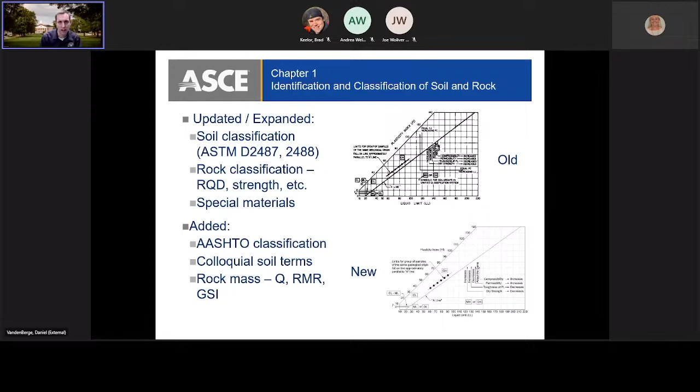Moving on to Chapter 2. This chapter is on field exploration, testing, and instrumentation. We updated and expanded the sections on field reconnaissance, remote sensing, and geophysics. Many things have changed in the last few decades in those areas due to technology and the availability of materials on the internet, and we felt the need to explain some of those in more detail.

One side note here, since I just mentioned the internet: we did our best to actually keep URLs out of the document because we didn't want links becoming dead with time. So we will tend to refer to locations or types of websites, but we tried to refrain from specific URLs throughout the document, and that was an intentional decision we made.

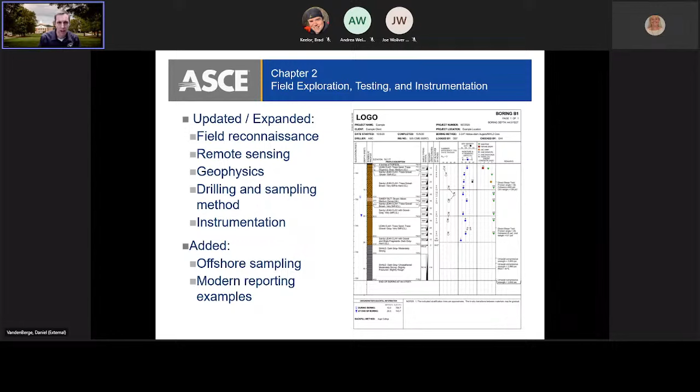Moving on to Chapter 3. This is a chapter on laboratory testing. We updated and expanded various parts of this. There's a large table, a few pages long in the new document, covering how much sample size you need for any given or common geotechnical laboratory test.

There's also an updated and expanded discussion of the standards and certification process, so people can understand how that works a little bit more.

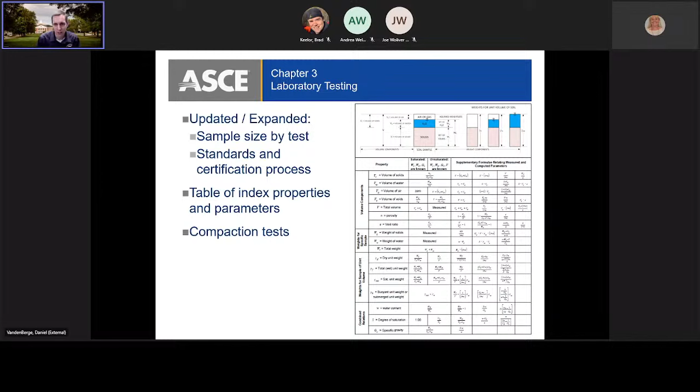There's a table of index properties and parameters provided in this case, and there's quite a bit of detail on compaction tests. There's a nice one-page figure that some academics may be thinking they need to get for their students—a nice supplement to all the different weight volume relationships we face in geotechnical engineering.

Chapter 3 also talks at length about strength tests. It discusses direct and ring shear tests, consolidated drained and undrained triaxial tests along with UU triaxial tests, unconfined compression, direct simple shear, lab mini vane shear test, as well as various dynamic testing methods.

Most of the test methods contain at least one figure showing both the apparatus and some of the data or results you would expect from that test. In addition, there's discussion of both incremental and CRS consolidation testing, hydraulic conductivity testing, as well as some basic rock strength testing.

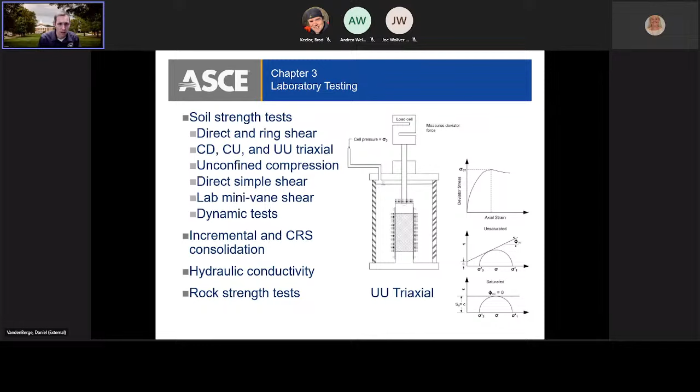Chapter 4 looks at the distribution of stresses. We've updated and expanded the sections on stress calculations and change in stress equations. This is a place where probably many of us grew up using some of the NAVFAC charts and tables. We've got a nice table focusing on many of the equations required for different types of change in vertical stress for different loads. We've also updated all of the change in stress charts, which we'll see a couple examples of on the next slide.

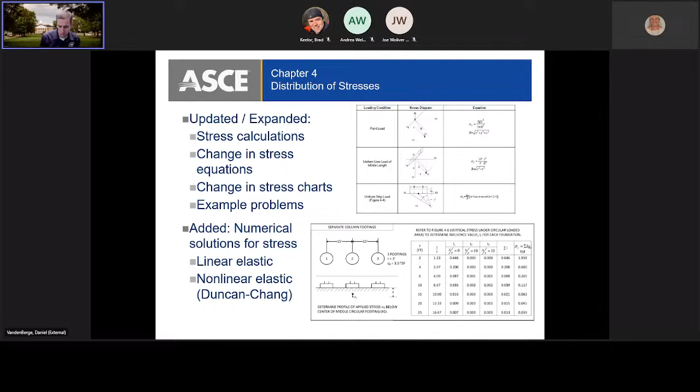And we've got some good example problems, so you could really spend some time looking at how we reach the solutions in these various example problems. One thing added to Chapter 4 is a few pages of discussion on numerical solutions for stress, recognizing that with the personal computing power we have, much of this does happen at the computing level. So we talk about linear elastic as well as nonlinear elastic numerical solutions for calculating stresses and changes in stress in the ground.

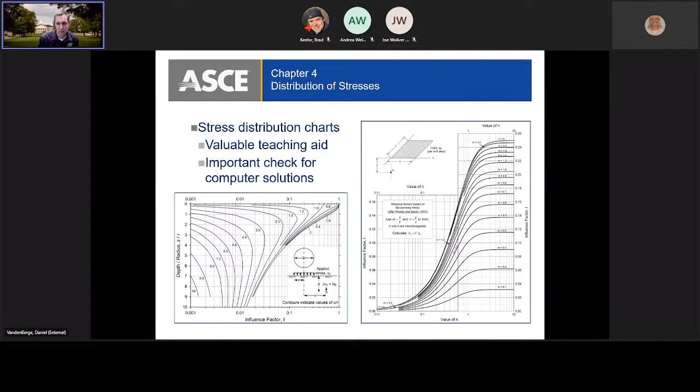A couple of the iconic charts from NAVFAC are shown on this slide. We recognize the value these have both for teaching aids as well as for important checks to computer solutions, or just for cases where you're not near your computer. We wanted to maintain and enhance the usefulness of these charts as well as some others included in the document.

Moving on to Chapter 5. This chapter deals with the analysis of settlement and volume expansion. This chapter was less so added to, but more reorganized and expanded. It starts off with a mechanics of consolidation discussion, going into a little bit of depth about what is going on in the soil during consolidation.

From there, we move into settlement of coarse grain soils, looking at a variety of empirical methods, and then settlement of fine grain soils using conventional consolidation theory.

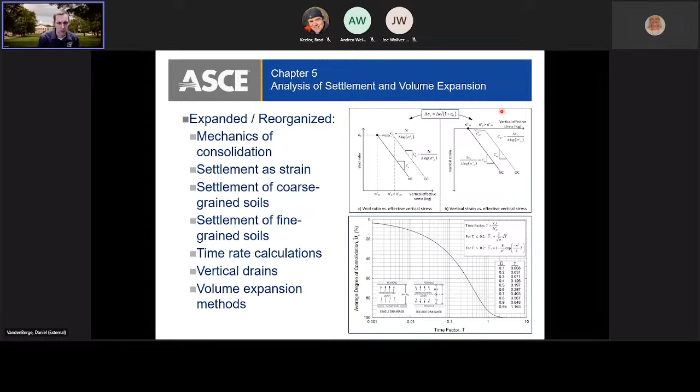If you plot the Cc correlations versus initial void ratio, you see a pretty consistent trend predicted by a wide variety of correlations. We've tried to do that in a number of places through the document, consolidating the known relationships into a more coherent whole.

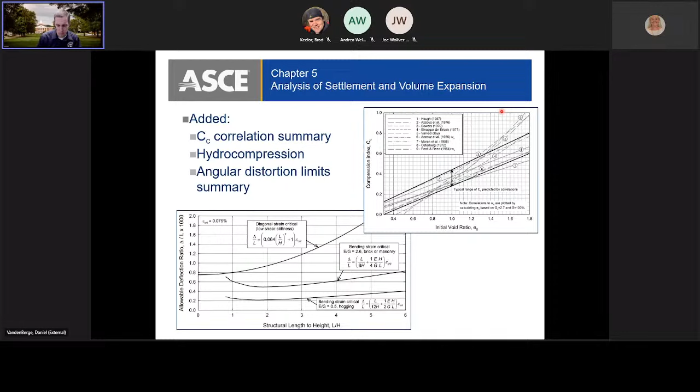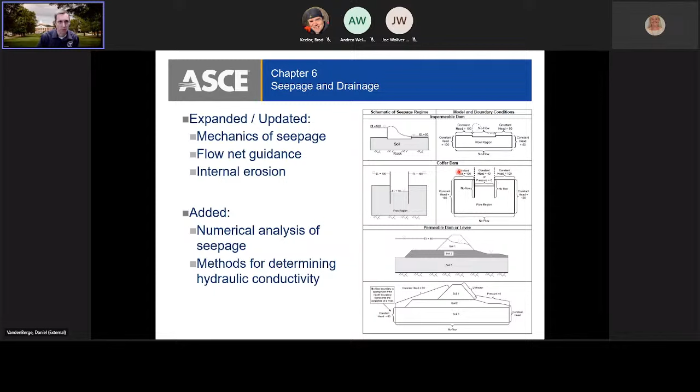We also had various methods of determining hydraulic conductivity discussed in this chapter. Then we also added mineral and geotextile filter criteria, providing the FEMA guidelines for designing filters. There's a nice step-by-step process for that within the document as well.

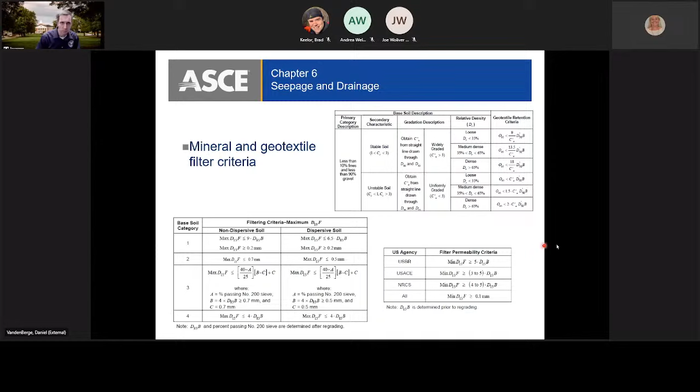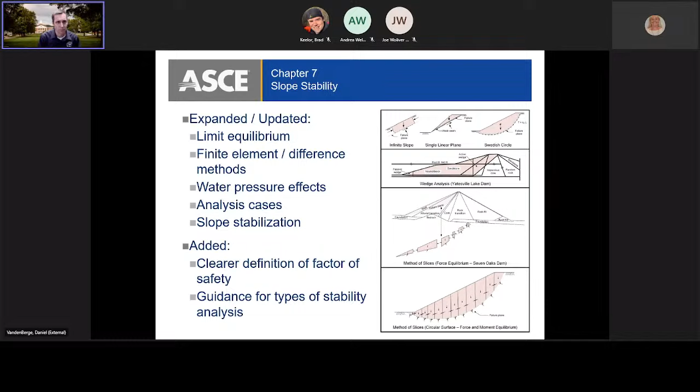Things that were added include a clearer definition of factor of safety, which was really not very clear in the original DM 7.1 - how factor of safety was being defined for slope stability. Again, some guidance for different types of stability analysis. We also added discussion of reinforced slopes and rock slope stability to Chapter 7.

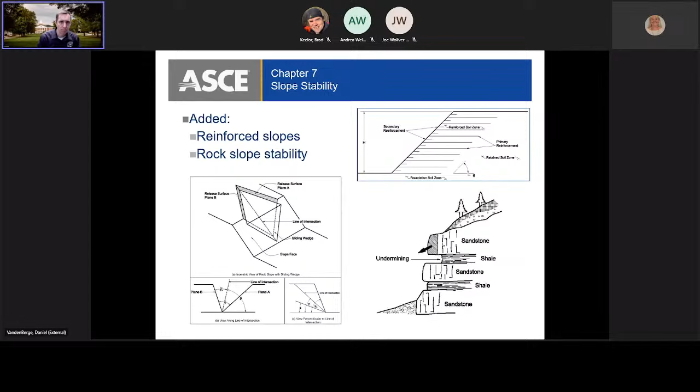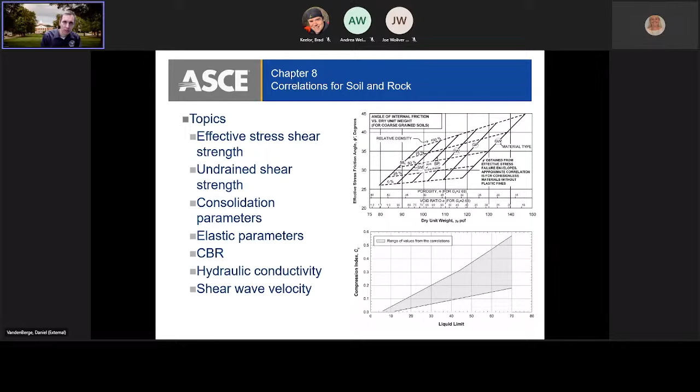And then finally, moving on to the end matter. The document has references at the end, and a long list of computer programs, which were up to date as of about 2 years ago. I'm sure they will continue to need to be updated. It also has a long list of geotechnical symbols, recognizing that sometimes we don't always do a good job of using the same symbol consistently across the profession. So we've tried to summarize that well, both within the document and more broadly in that table.

And then there's again a glossary in this document as well. So in summary, I believe our team has produced a great resource for the geotechnical community, first and foremost for our DoD and other government agencies to use. But we know that practitioners use this, we know that academics use this, and we believe it's a great resource for everyone to share. We also believe we've been able to preserve that legacy feel, but in an up-to-date format, so we hopefully have been sensitive to doing that well. And then finally, we just want to promote geotechnical practice through what we believe is a summary of the state of the practice methods within geotechnical engineering.